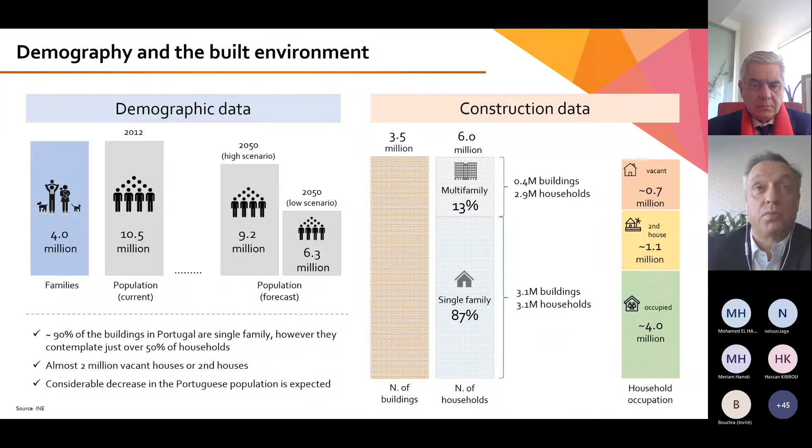So it's a large number of buildings we have. Only 4 million of the buildings are actually occupied. About 1/3 of them are second houses or vacant. So this shows the kind of universe we are talking about when we want to improve energy efficiency of this building stock.

And what has been the history regarding this sector? Well, in terms of energy efficiency, until 1990, we had no energy requirements in our legislation. That was when 3.8 million buildings were actually constructed. So most of our building stock didn't have any kind of energy requirements when it was built. In the 90s, we only had the first regulation, which was not quite turned to energy efficiency. It was more on pathology prevention. So we had more than 10 years of a simple regulation that addressed the pathology issues, and a lot of buildings were built during that time as well.

Only in 2006 we had the first actual regulation that was pretty much turned to energy efficiency. It was a consequence of the European directive and really made a change. But you see here, it didn't affect that many new buildings. So 95% of our building stock was built prior to energy efficiency requirements. That turns out to be quite a challenge, because if you want to turn this building stock into a more efficient one, we have a lot of work ahead of us. Only a small part, about 300,000 buildings, were built under well-established energy efficiency requirements.

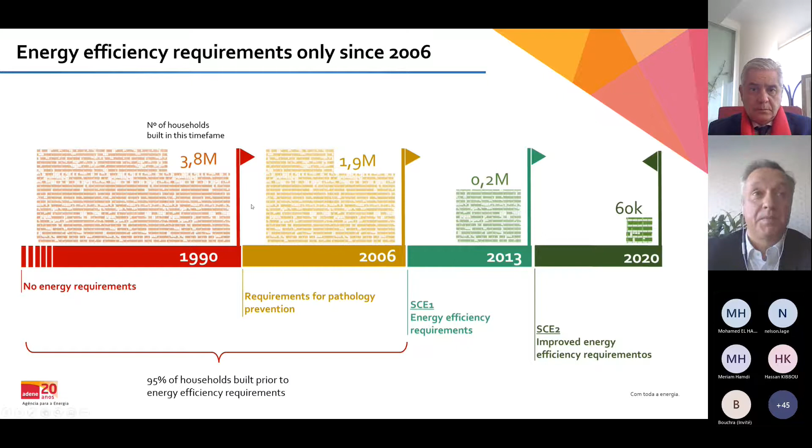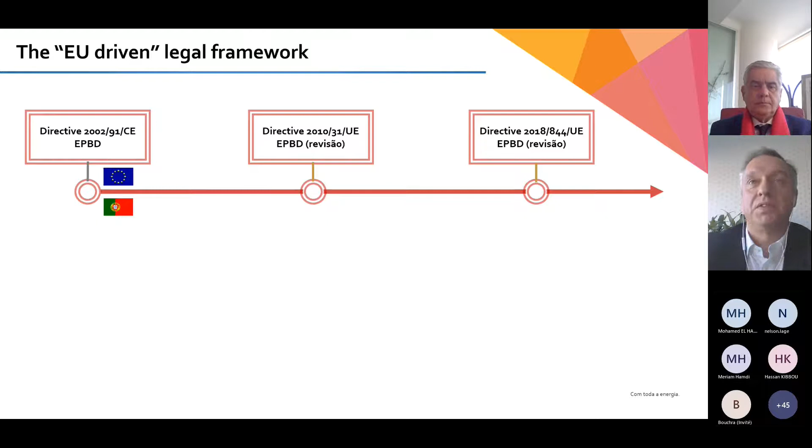So what has been this legislative path that we have been going through? It has followed the European directive, which was first issued in 2002. It set the framework for all member states in the European Union to change their legislation to adapt to these requirements. It has been revised every 8 years, more or less. The last revision of the directive was in 2018. And we in Portugal have transposed this directive into the national regulation in a few steps. The first one was in 2006, where we had the first 3 decree laws that did this transposition.

Most of the issues were technical. We had a calculation methodology that followed more or less European standards. Minimum requirements were set in terms of quality of the elements that were built. There was a clear focus on new buildings and renovations. The initial aspect of the directive was very much focused on that. And it also introduced for the first time the energy certificates or energy labels, as well as qualified experts or professionals trained specifically to address energy efficiency and energy certification of buildings.

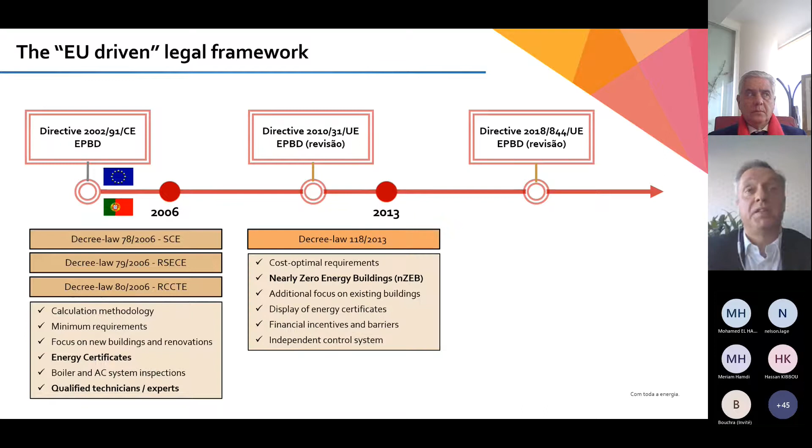Following the second directive, we also updated our legislation with another decree law, which brought us to another level. The requirements were adapted to a more cost-optimal standard.

It introduced for the first time the nearly zero energy buildings, a concept that is now fully in place throughout the European Union, and also here. There was an additional focus on existing buildings. It was clear for all of Europe that the problem we have to tackle is the existing buildings, not so much new ones, because new construction is not that big.

Display of energy certificates, and also some other issues related to incentives and barriers that should be improved to allow a stronger focus on energy efficiency. And finally, in 2020, just one year ago, more or less, we published a new revision, another decree law, which was clearly focused on existing buildings and turning buildings smarter.

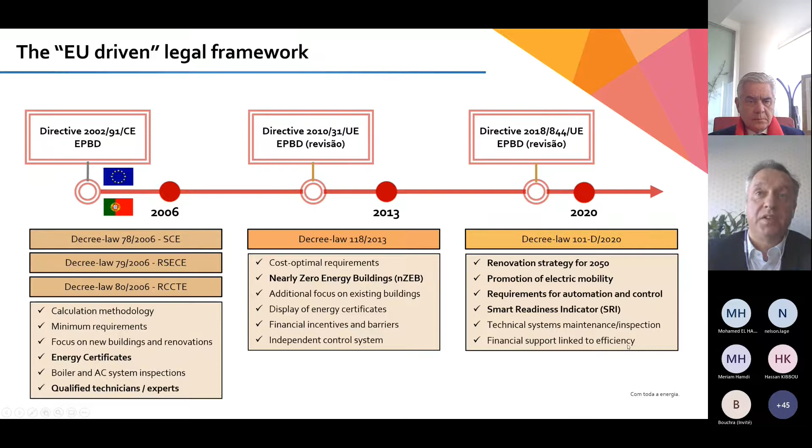Renovation strategy: we had to put in place a renovation strategy for 2050 to address the existing building stock, going for electric mobility as well, the integration of electric mobility in the buildings, automation and control of energy systems, having a smart readiness indicator as an option, which is making its way through all member states as well, and also the aspects related to inspection, installation of equipment, and a clear link between financial support and energy efficiency. So this basically paves the road to where we are at this stage.

And we show here in a very schematic way what this has done in terms of energy consumption in the buildings. If we had no requirements, we had a lot of consumption at the beginning, and then we started shifting as legislation went into force to buildings with less energy consumption, but also at the same time an increasing amount of renewable energy being used, and that has been slowly upgraded, and we are now at the nearly zero energy building standard, where buildings must be constructed to have as little energy consumption as possible and as much energy supplied from renewables as possible. So we are now going into this new standard.

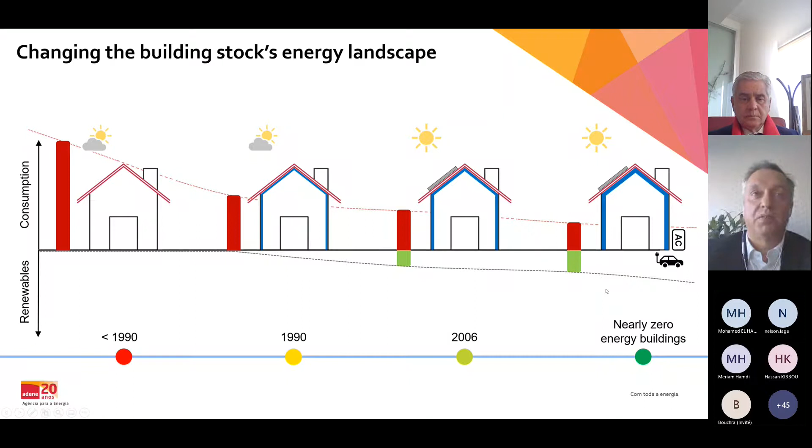In terms of legal requirements, what we have so far, we have requirements for both residential and non-residential buildings, for walls and roofs, windows, ventilation systems. More or less what you also mentioned in your thermal regulations. We also have something about lifts and electric charging infrastructure as well. And all buildings have to comply with energy performance requirements.

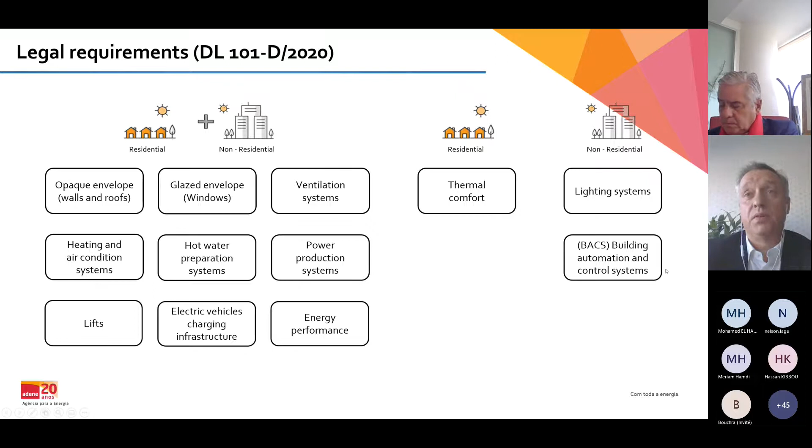But if we look at residential buildings, we now have a thermal comfort requirement as well, which is interesting, due to be implemented shortly. And non-residential buildings also have requirements for lighting systems and for building automation and control systems. So this is basically the requirements framework that we have for both types of buildings. And besides technical requirements, we also have design, installation, and adjustment requirements, so these systems are well designed and well installed to achieve maximum efficiency throughout their lifetime.

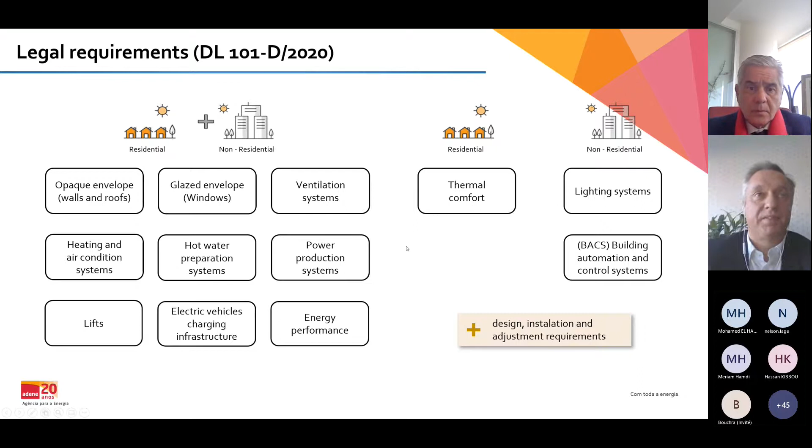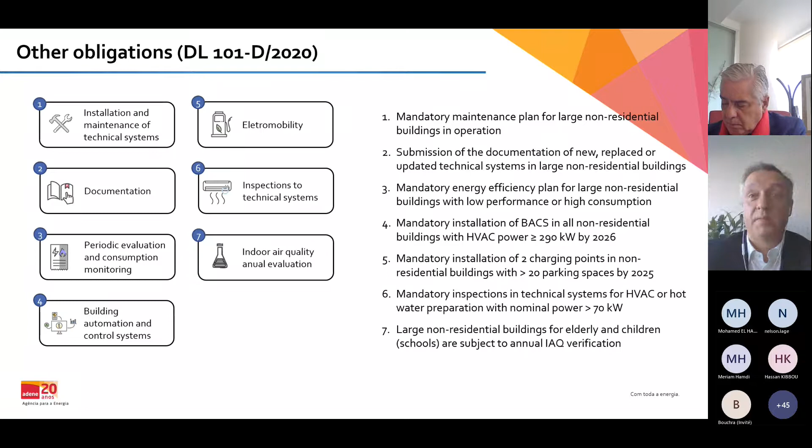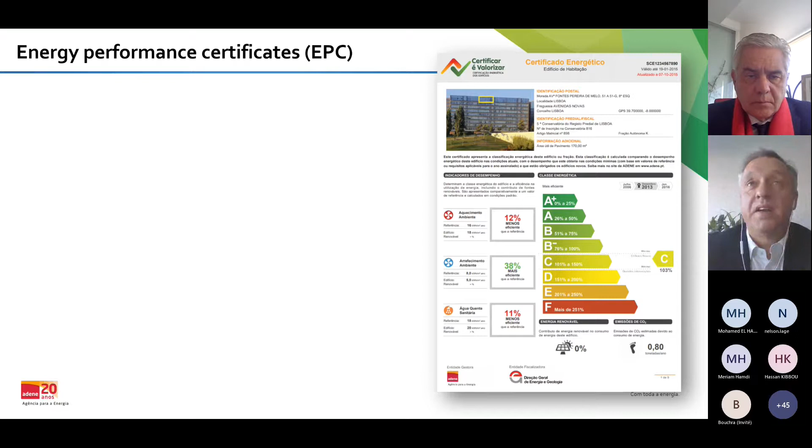But the real game changer of all this legislation has been the energy performance certificates. Besides having these requirements in place, the energy performance certificates are the ones that led to real compliance with these requirements. They are mandatory. It's a mandatory scheme since 2009, since the early stages of the EPBD transposition in Portugal. As in your case, it's a way to check if the minimum requirements for new buildings were met. Only if you have met these minimum requirements are you allowed to issue a certificate, and that really pushes the whole chain of professionals to come up to standards.

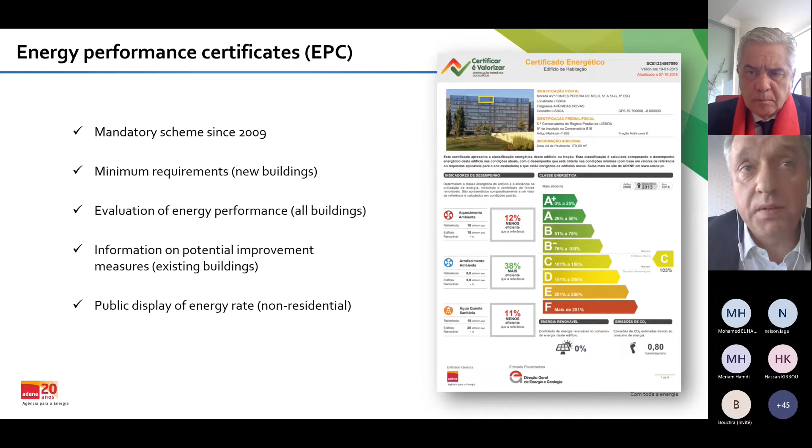Also, in existing buildings, and all buildings actually, it allows the evaluation of energy performance. We have a scale from F to A+, and it allows us to communicate very simply with the consumer, which is the key aspect of the certificate. Another key aspect is to have information on potential improvement measures in existing buildings. What can people do to improve the performance of their buildings? There is also public display of the certificates in non-residential buildings, and that really makes a difference for people to be aware of the performance of the buildings and brings this energy efficiency issue to the life of common citizens.

Having this in place has allowed us to collect a lot of information. We are now at a stage where we are able to bring our buildings under the EPC microscope. We have more than 2 million certificates issued so far, which is about one third of the building stock, covering more than 12 years of certificates already issued.

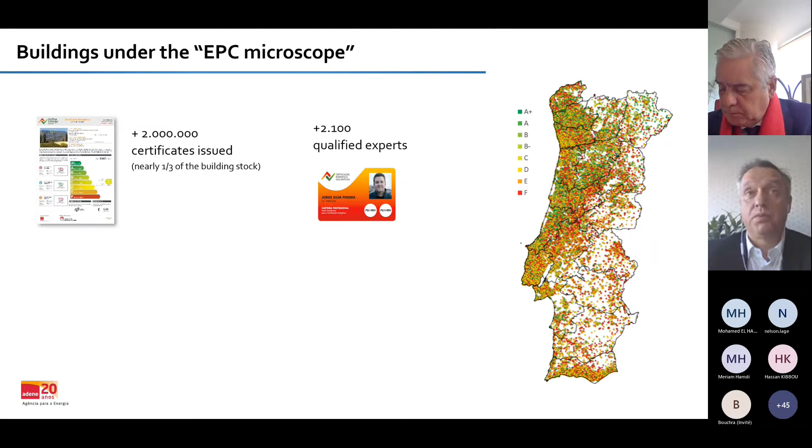It allows us not only to color each house according to the scale, but also to know a lot about each house. About 200 data points are collected for each house, going into very small details. We have done this with more than 2,000 qualified experts that we have trained and qualified to issue the certificates. They go through training, and they are the ones in charge of checking the minimum requirements in new buildings and rating existing buildings as well.

This work has also allowed us to identify more than 3.5 million energy efficiency improvement measures in houses that are already certified, existing houses. So a lot can be done to improve these houses, and the average investment for improving each house has also been estimated for residential houses.

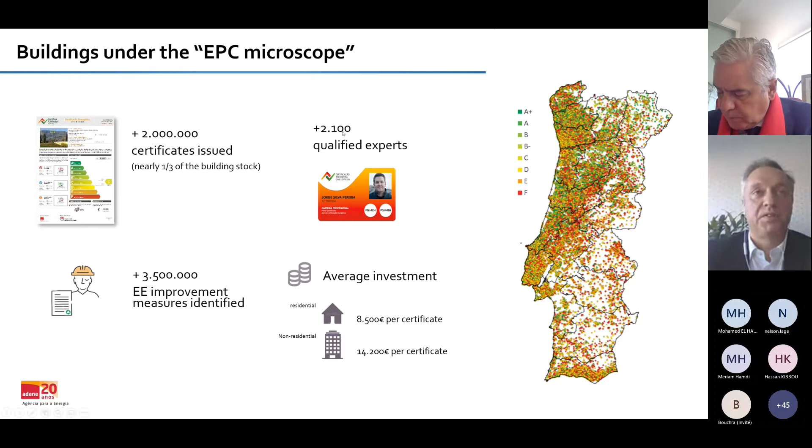If 8.5 thousand euros per certificate is invested, we can upgrade the house to a nice standard. For non-residential buildings it's a little higher, but we have that figure too. So it allows us to see what needs to be spent to bring buildings to a good standard.

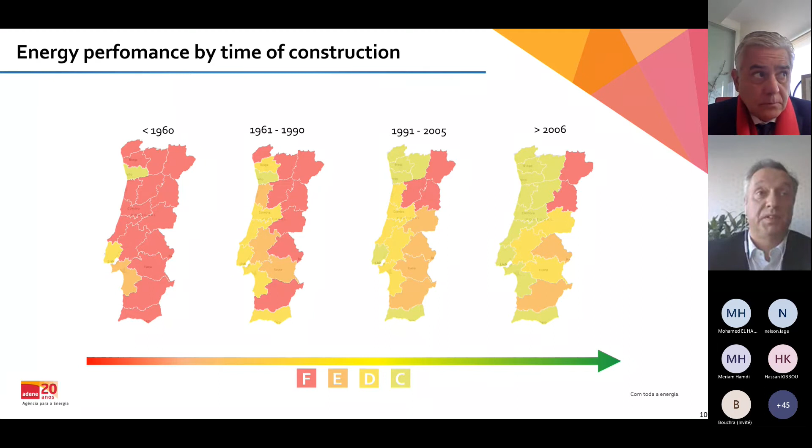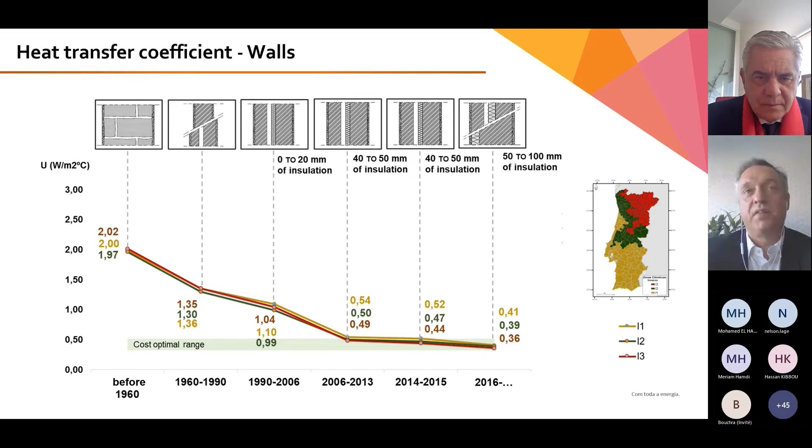It also allows us to go very deep. We can have a clear picture of what is the average U-value, for instance, for walls and also for windows, and other parameters and characteristics used to compute the building's energy performance. So we can access this kind of information at this level of detail, which is quite interesting and relevant to conduct analysis.

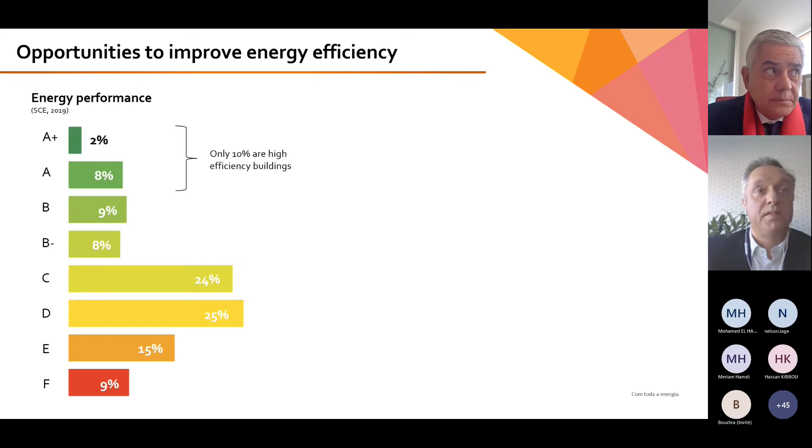But overall, what we are interested to know is how we can improve the existing building stock, which only has 10% of buildings with high efficiency, rated A or A+. How can we improve the other part, the three quarters of existing buildings?

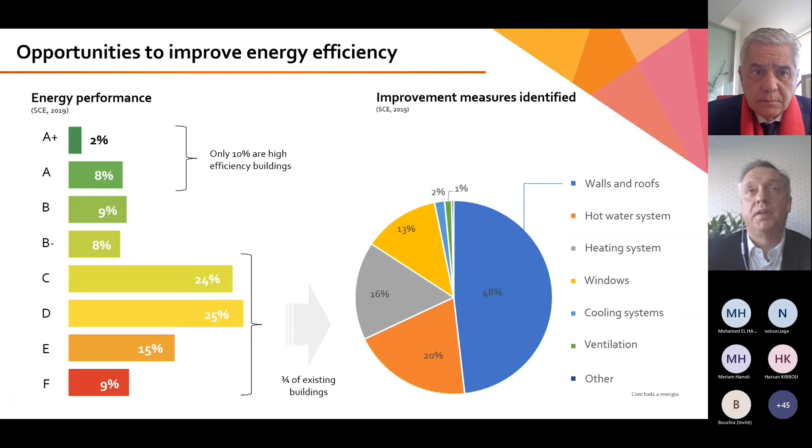Certificates also allow us to see that we can change walls and roofs, so most of the opportunities, about 50%, are on the building's envelope. We can also target hot water systems and heating systems, which are also opportunities we can use to improve the performance of houses.

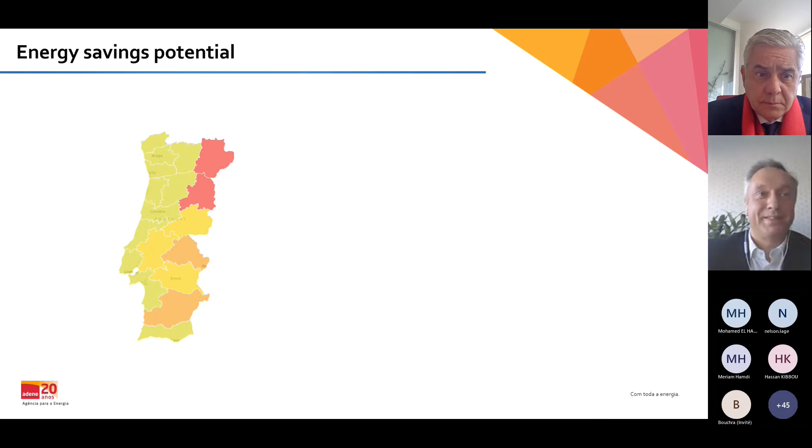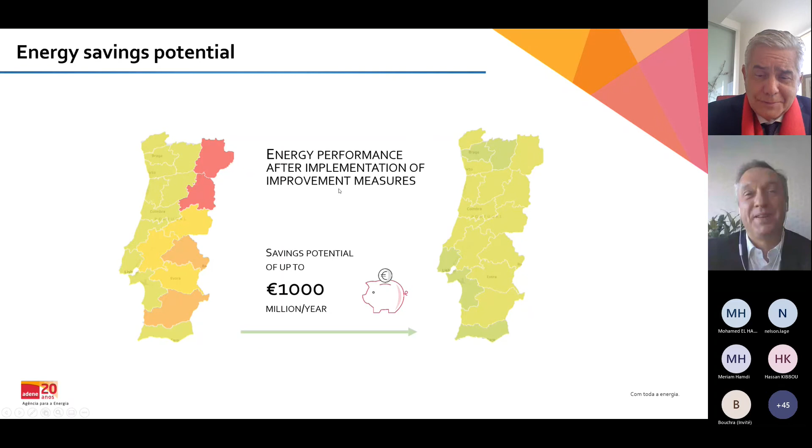This is quite relevant information. If, in theory, we could implement all the improvement measures identified in the certificates, just by magic, that would mean we could make the country much greener in terms of energy performance, and would allow us to save up to 1 billion euros per year in energy bills. It's an estimate, obviously a potential, not fully feasible, but it shows the path and what can be done.

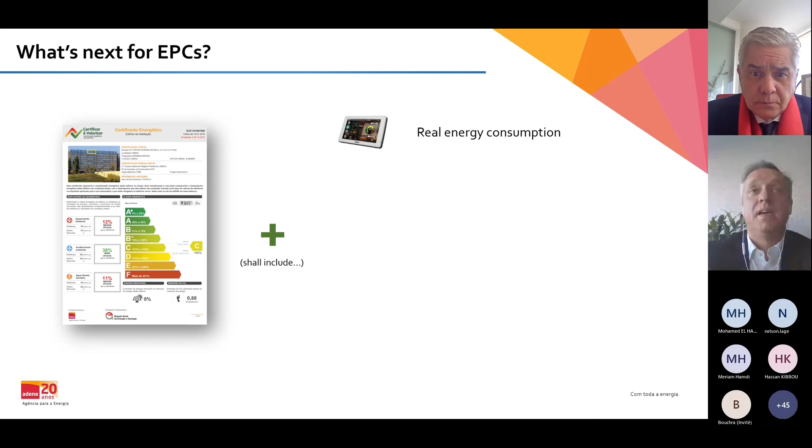So this is how EPCs are being used at this stage. What's next? They are a tool that is well known at this stage in Portugal, but they will have additional features, like real energy consumption data. Not all, because this is computed under standard conditions to allow comparison between buildings, but we can add information about real energy consumption in the certificate as well.

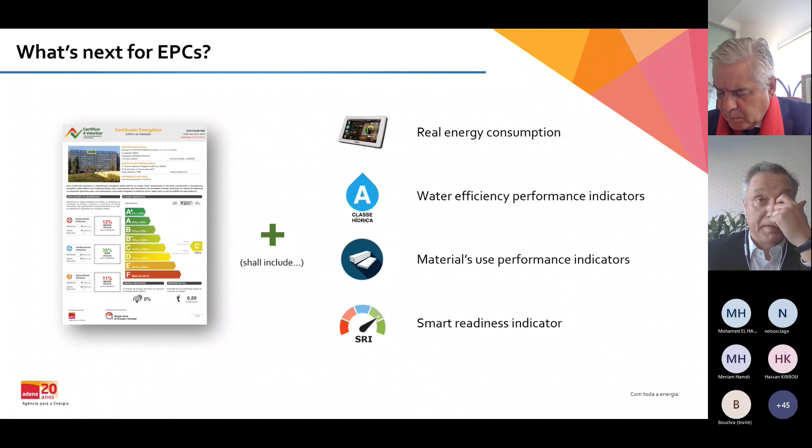Going for water efficiency performance indicators is another issue we are dealing with here, along with materials use performance indicators, and finally, as I mentioned, the smart readiness indicator referred to in the directive, having that alongside the certificate as well. So it's a starting point, but we are planning to add all these additional aspects to increase the value of the certificate.